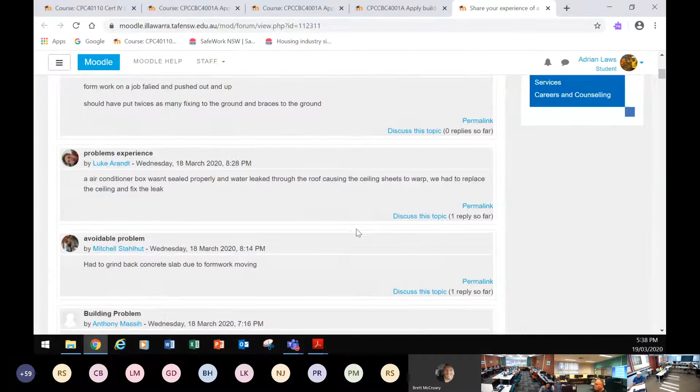That'll actually give you a green box at the top of your completions. But I'm just going to go through this, and anytime I see nothing's been discussed or solved, I'm going to go through and have a look at it. Just like tonight, we're going to have a look at different ones.

So here, for example, Jay's got one here that we're going to have a look at tonight. People are going to post different situations, and we want to be able to post where does the National Construction Code talk about that. Let's have a quick look at this one that Jason's put up. I want you to post things like, where does the National Construction Code discuss it? So in this case, the roof was not flashed properly and it caused a leak.

There's actually an amazing amount of these on all of your posts, and there's heaps of posts, maybe 50 or more posts that people are building problems.

And we want to look and see where in the National Construction Code it tells us the solution. Here, for example, if we go to 3532 for the 2019 code, that'll tell us that we need to make sure we build according to these things so we can get it all sorted.

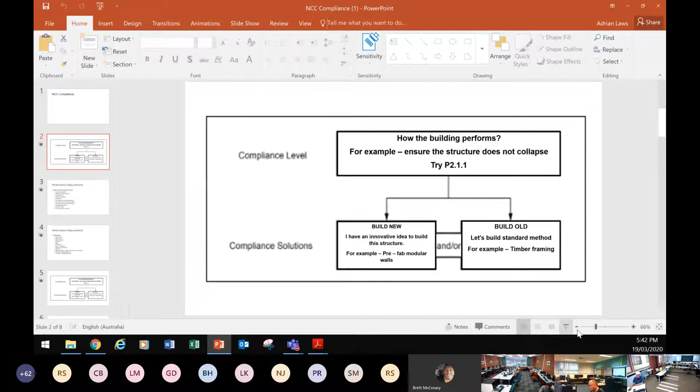Maybe I'm overloading the system here, opening up too many things. Let's just have a look. Oh, jumped onto the wrong screen. Oh, that's going to shoot me through to the other screen, sorry. Let me just escape out of that one.

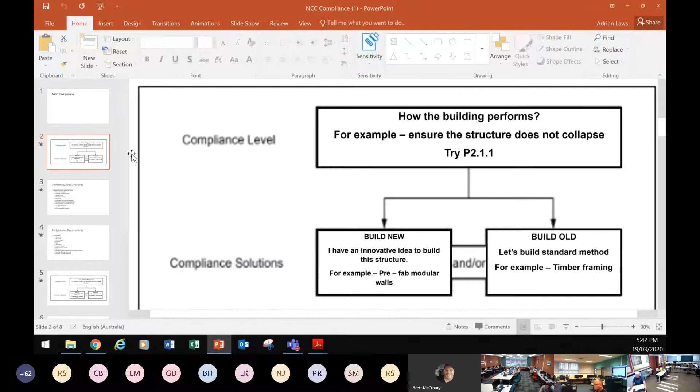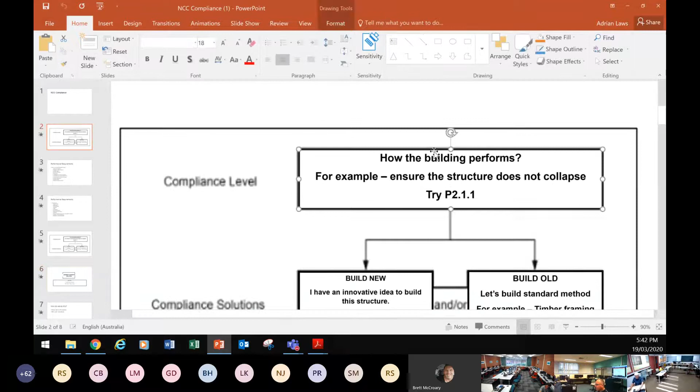So we've got the National Construction Code here, and you can see pretty much what this is going to deal with is how the code works. In the code itself, you'll see it deals with things - I'll get down here to the bottom. Oh, this one didn't have that on there, so we'll just get rid of a couple of these, get rid of a bit of this, so we've got a little bit more room. So you can see pretty much the code.

There's things listed in broad terms that tell us, for example, a building must resist water or something like that. Then we can either go down to a deemed-to-satisfy solution, which we've been doing, where it says you can use Australian Standard XYZ to resist the water, or use this method or that method. Or we can come across to a performance solution, which might be manufactured by a company who build technical documentation around their particular product. They're the main ways of how we use the code to make sure we comply. Okay, so we'll shut that down and jump back here and look at a couple of the activities related to that.

So what we're going to do now is have a look at a real practical activity.

And this is one that Brett has posted some time ago, for us to have a bit of a look at. So if you just refresh your screen, we're going to have a look at this particular activity here.

Brett says here, we've got a problem. We need help to be able to build a building correctly. And if you look at this particular activity where we can post some information, it says room heights help.

I need a certifier. During renovation to an upper floor, they discovered plumbing pipes had to be lowered, and that affected the height of the ceiling. Please confirm the height that is permitted for a kitchen.

So, for example, it's a Class 1A building. Ceiling height underside of plasterboard through most of the building is 2,400. So, are we allowed to have these plumbing pipes from an extension on the first floor? Are we allowed to have the plumbing pipes extending down below that 2,400, which is the bottom of that ceiling?

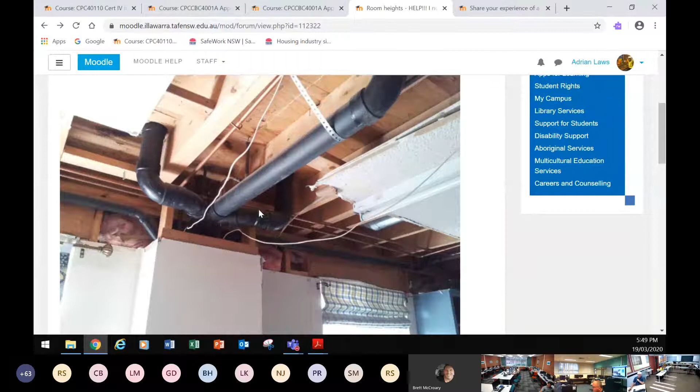But all in all, your ceiling in the kitchen is going to have parts of it which are below the 2.4, and you've all been awesome. I feel like we've really been getting this unit across to you, because you've all been able to go straight to the code and demonstrated that you can access it to find the ceiling height. So, don't need to spend any more time talking about that one - you've just done great. I'll go on.

I'll just check what I've got here for this one. Okay, so you've all done great there. I don't even need to - I will show you what the answer was in that particular one, which you've all gone to and found anyway. So that's fabulous. Now I'm real confident that you've got a real good grasp of volume 2.

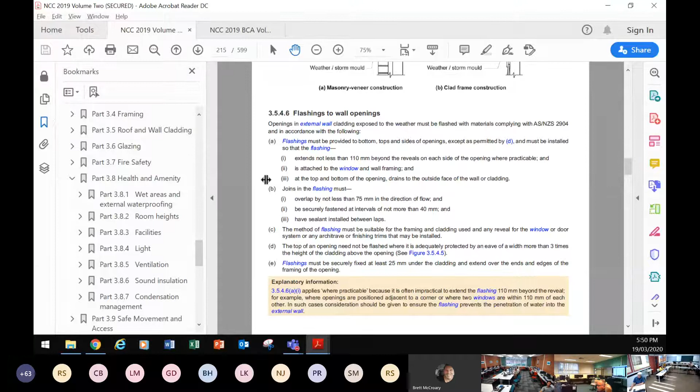Just let's refresh our memory here on volume 2 before we go on to volume 1, because volume 1 is quite confusing. For volume 2, I know you already probably know it, I'm just going to get to the point where I can make this a little bit wider. This computer's going quite slow.

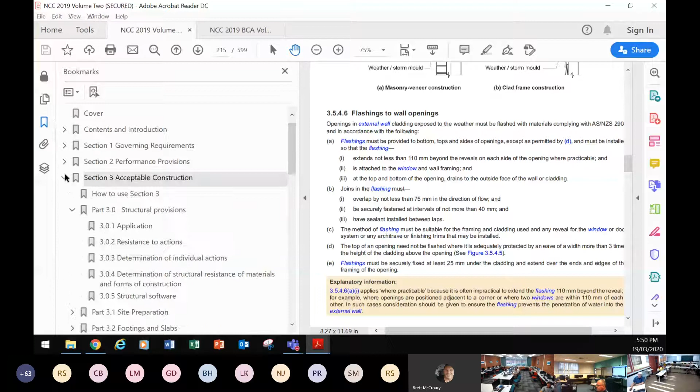I'm going to start at the top on the left-hand side here, and anything that's pointing down, I'm going to shrink it up so I can see the overall concept of what's in this document. There we go. So in fact, I can see everything that's in the document.

It's going to have the cover content, section 1 governing requirements, section 2 performance provisions, and section 3 acceptable construction. Those two parts there - section 2, I think you can see there only that information. Section 1, 2 and 3, that's where we live.

Okay, so section 1 tells us broadly a bit about the code - it's got classes of building and things like that. Section 2 tells us broadly what a building needs to do, and section 3 tells us how to do it. And then of course the last thing here, schedule 4, tells us where our Australian standards are. Definitions define things, and then state and territory, and there's other things there that are important. So that's pretty much how volume 2 works.

Now volume 1's a different beast altogether, and it'd be lovely if they used the same formatting, but they don't, and there's not much we can do about it. They're slowly changing things, and I suppose that sometime down the track they probably will make it a bit easier to navigate. But in the meantime, before I actually reveal it, let me just show you how volume 1 works.

So up here I've got volume 1. I'm going to get rid of that little bit over there and shrink this down so you can see a little bit more that it is volume 1, and this is the 2019 version. So make sure you're on the 2019 version, because the activities you do in the course that I'm doing here, they pretty much won't work for the older version.

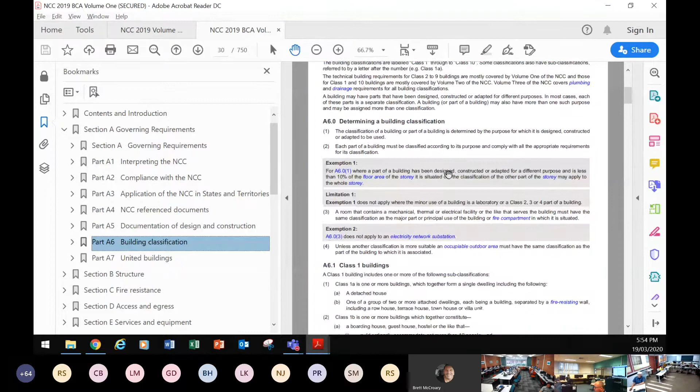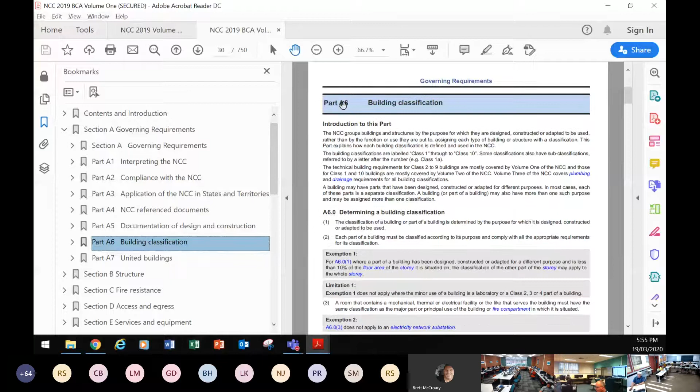Once we start working our way down there from that particular part, building classification, it's got introduction and that type of thing, and it'll go down there and start doing all of our classifications for our buildings.

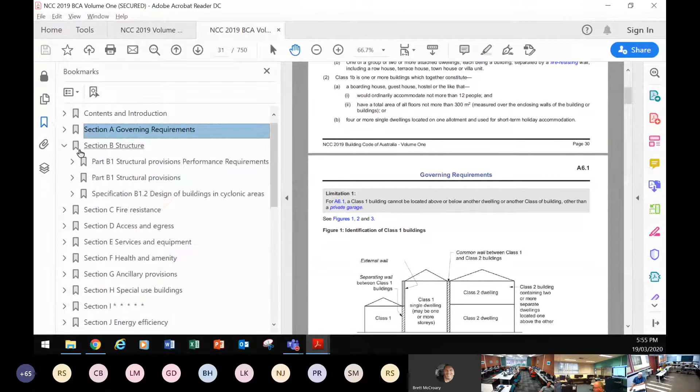So I can shrink that back up, and then I can come down here to structure. I can expand structure, click on structure here, and it tells us a little bit about structure. Come down a little bit further, and it's got a lot of the provisions and things. If I expand on that, I actually get all of the different things to do with structure there.

These ones are listed interestingly, because with these we have section B - remember, that's a letter, not a number. And then once we start jumping down below section B, we start going B1, and then B1.1, B1.2, 0.3, 0.4. So that's B1 in there. And in this particular case, they're all listed as B.

Some of them might go to C2 or something like that. I'm not quite sure how each individual one works, but as we expand them out, we can see there's information there. Most of them are pretty much the same, where we have structural provisions, performance requirements, and some information like that. You can see with this one here, we've got C is fire resistance. If I expand that one out, we've got structural ability, spread of fire - they extend down, and each of those just gives us more information.

So without jumping in too quick and getting too confused, you'll see that most of these will have an ability to be able to quickly jump to these things. In this particular one here, we've got structure at the top.

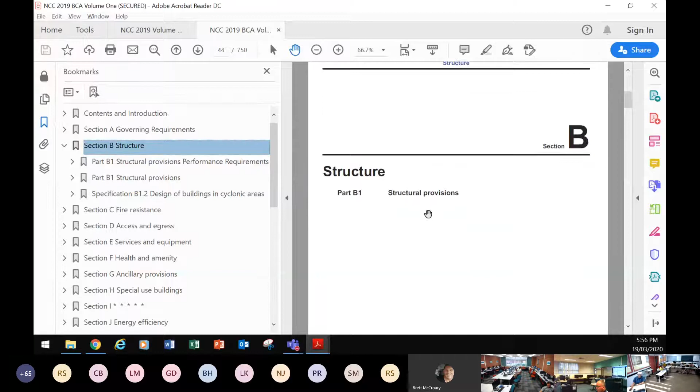We go down a little bit and come to structural provisions. Before we go that far, underneath structure we've got some headings, and each of those allows us to click on it. First of all, we've got our performance requirements.

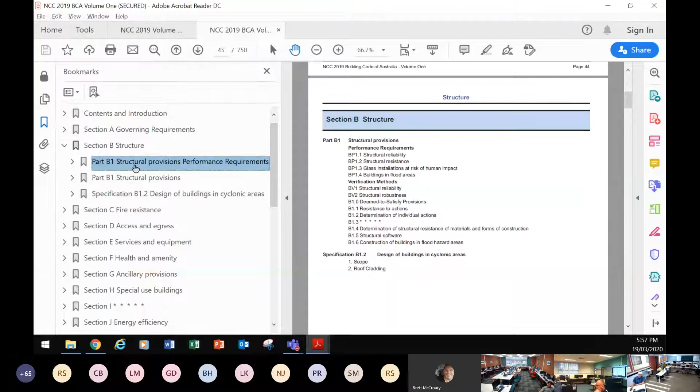In volume 2, our performance requirements are here under section 2, and then we have our acceptable construction. With volume 1, we have our performance requirements, and then our verification methods and more information. So we kind of have performance requirements for each different item, not just one whole section on performance requirements.

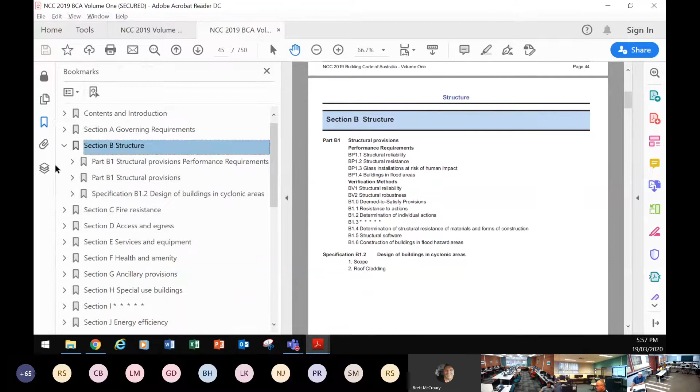So that gives us performance requirements for structure, and then we go into the structural performance requirements. It lists all the things to do with that. We can even expand that a bit further if we want to.

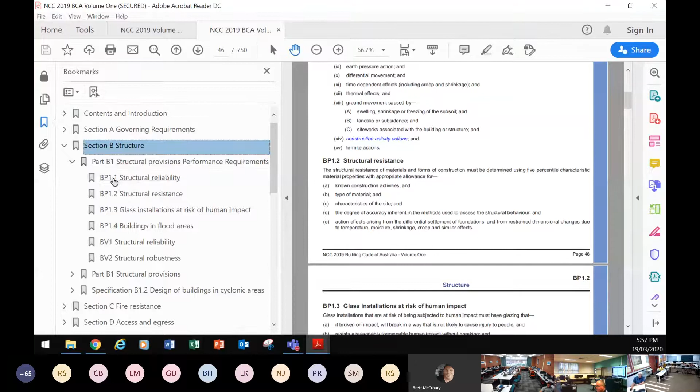Then when we come down here to fire resistance, we're going to have our different parts where we'll go into some of the different performance requirements for things as we go through. So we start to get this structure where we've got, for example, section B, then part B1, and then BP1.1. And under that we might even have more things.

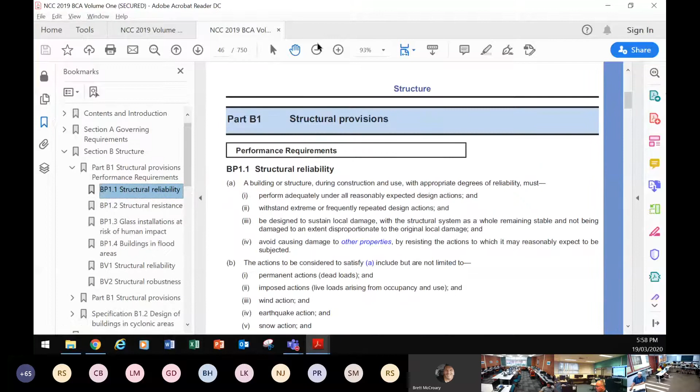If I expand that out a little bit, you can probably see on the side there. If I bring this across, you can see for this one we've got a BP1. So B1 is the structural provisions, BP means performance requirement, and that's 1.1. And that'll go through for some more, 0.2, 0.3, 0.4.

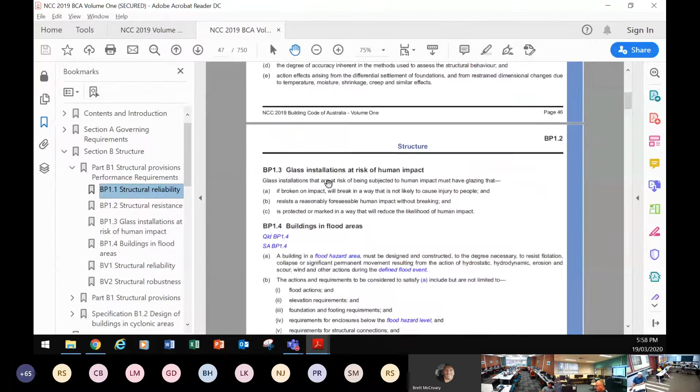And then we come to a thing called verification methods, and this will be a BV. So B is the section, and V is the verification. And we can keep on working down there as we go looking for things.

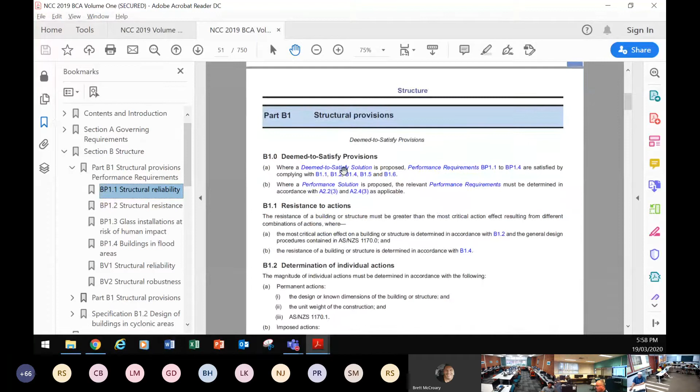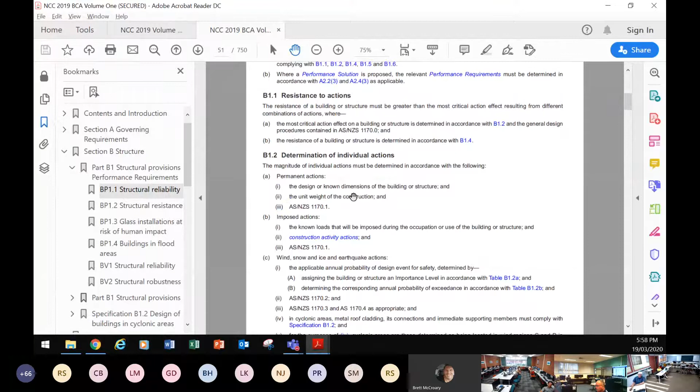And eventually that's number 2, and eventually we come down to our structural provisions. This is where it starts to feed us into some more specific information. Look at that there - this particular one refers us to Australian Standard 1170, which is the Australian standard for loads on buildings. So this has gone down real specific into how our building is built.

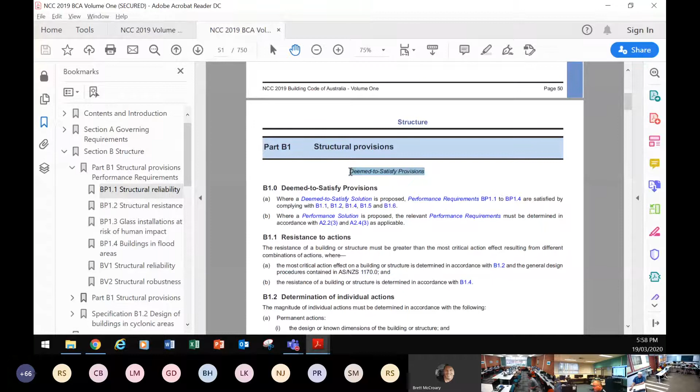And then we keep on coming down there. Remember, this is under the part here for structural provisions, and this is under deemed-to-satisfy provisions. I personally think that heading probably needs to be much bigger, because on volume 2 it's basically deemed-to-satisfy as a really big heading for things, but this is pretty much what tells us.

So for volume 1, we see deemed-to-satisfy, and it's going to refer back to these performance requirements. That's pretty much how this code is quite different - volume 1 is quite different in its labelling to volume 2 and how it works.

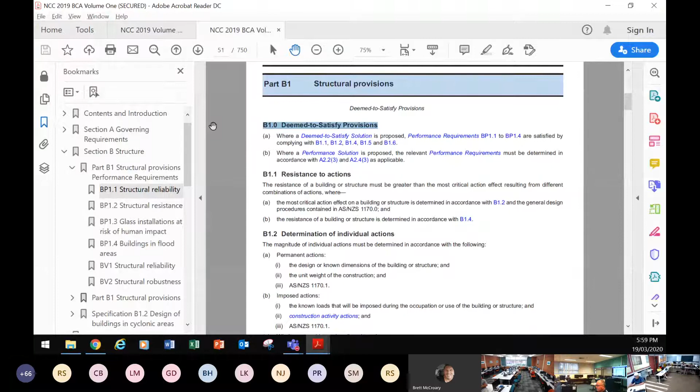Now let's jump back to, just refresh this, and let's jump to our PowerPoint here on energy efficiency and have a quick look at how this actually works for energy efficiency.

In this particular example, let's think for residential - we need to meet the performance requirement for energy efficiency. Under volume 2, if it's residential, it's going to be P2.6.1 for building, and that's the type of thing it might say. You have access to this PowerPoint yourselves.

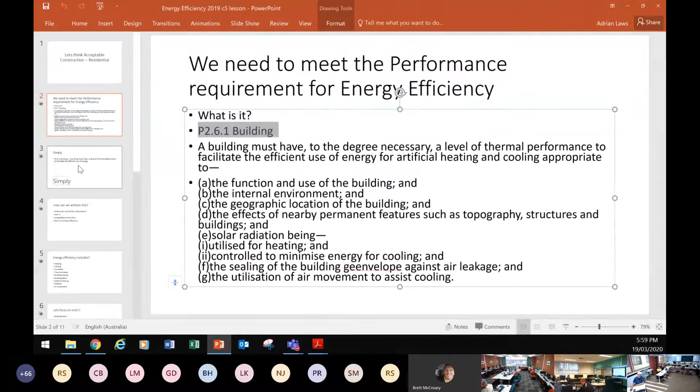So basically it says a building must have a level of thermal performance to facilitate the efficient use of energy. I'm pretty sure that's the wording from volume 2019, but if that's a little different, forgive me for not getting everything up to 2019. I think I've got most things.

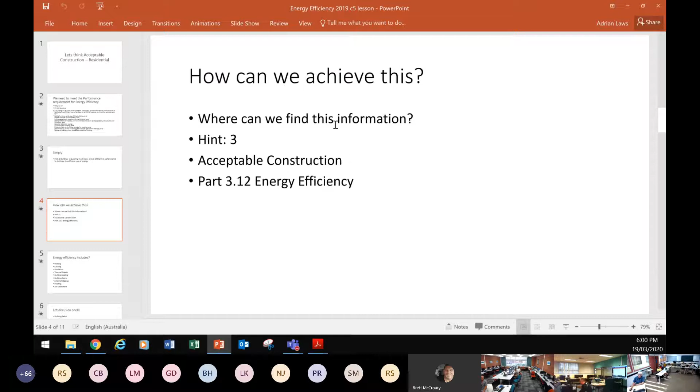And so it says, how can we achieve this? And we go to part 3. So that's a key right there - if you see part 3 point something, that's going to mean volume 2. If it's not a number but a letter, that would be volume 1 generally.

So these are some of the things that it talks about in volume 2, and then we look here focusing on one of them - in this particular case, 3.12.1, the building fabric.

And if I go now back to volume 2, and if we look at section 3, which is here, I'm on volume 2. So on volume 2, if we go to 3.12.1.4, so I'm on 3 here. Where are we? Section 3. So we're on section 3.

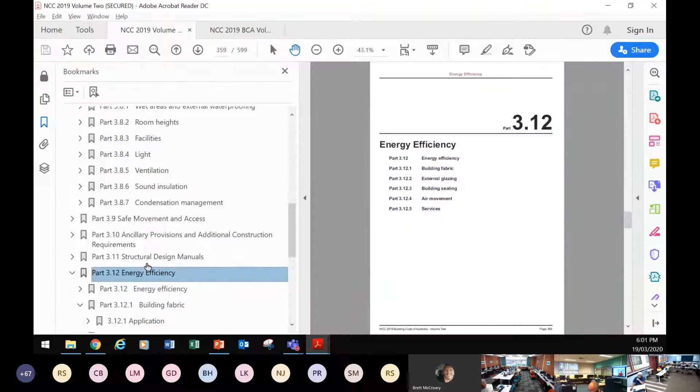And if I go down here till 12, I'll pump that up onto the side so you can see it with a bit more magnification. So back here on our PowerPoint that's available to you, we're looking for 3.12.1.4, so we can see exactly what's required for external walls. So 3.12.1.4 A and B.

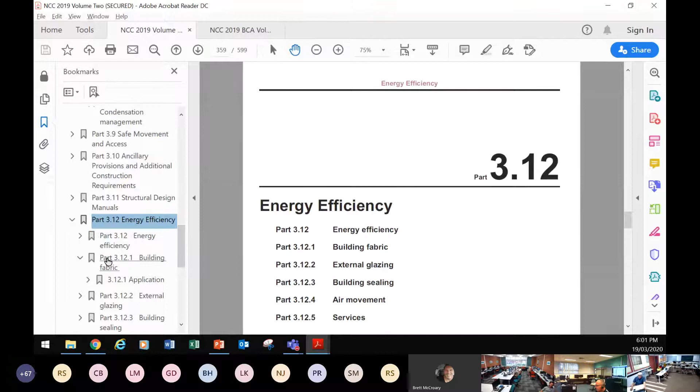If we go to 3.12, I don't know whether these are linkable, so we've got to use the side here. We're looking at 3.12.1.4. There's 3.12.1, and we're looking for 3.12.1.4. So I'm just going to go to, I think it was 3.12.1.4.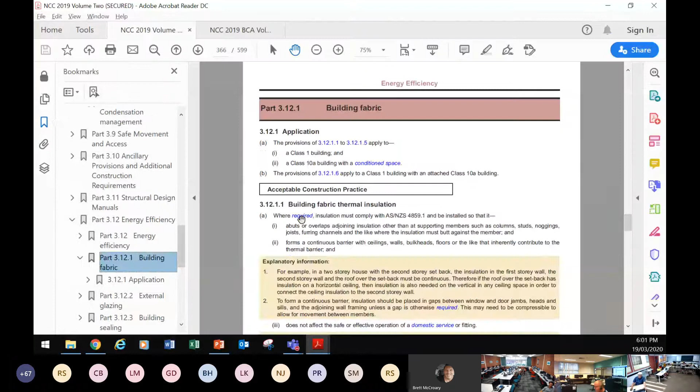So that's back up here. 3.12.1, the building fabric. This talks about the building fabric, and the one I've highlighted for you for external walls is point 4. So we'll go down till we get to point 4. That's point 2, roofs, keep going down. If you want to find that quickly, bring up the search, I think it was external walls, not floors. So I'm going to bring up 'wall', and that should take us quickly through.

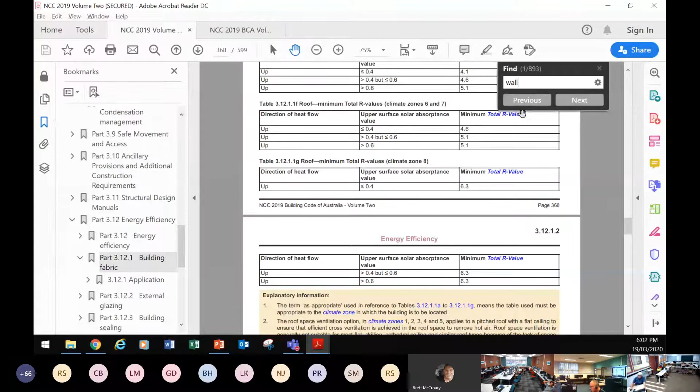There you go. It's taken us straight through to the next instance, from the page where I was to 3.12.1.4. This is going to tell us about external walls. So I'm going back here to look at what it's asking, what I've directed you to. In this particular case, we're looking at what the details are for the building fabric for external walls.

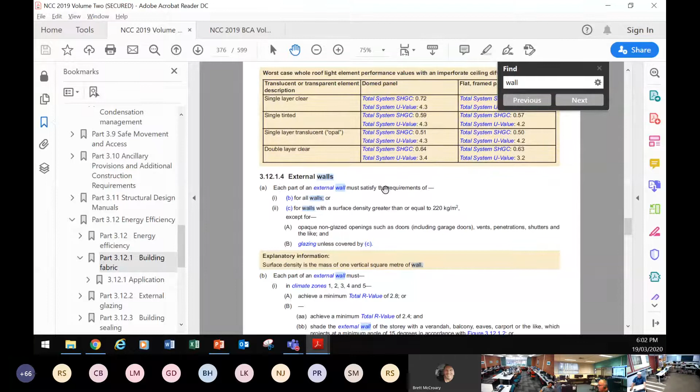And it says there we must achieve a total R value of 2.8. So here we go, we can read through here. It says each part of an external wall must satisfy the requirements of B for all walls, which is here. And if we keep going down, you'll see there's a little bit of information for certain types of walls. And we come down here and see each part of an external wall must, in climate zones 1, 2, 3, 4, and 5, achieve a minimal total R value of 2.8.

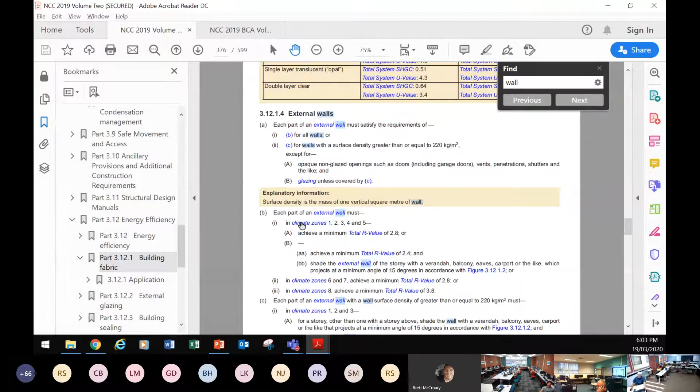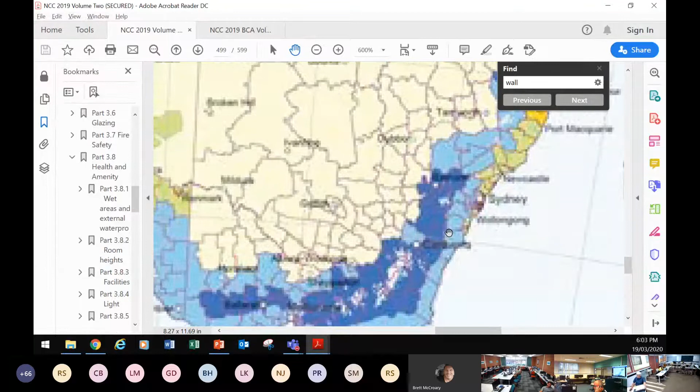Okay, so anybody guess what type of climate zone we are in here in the Wagga area, for example? We can look at it. The Illawarra area would be a bit different, so we're going to have to zoom that up, obviously. But this particular map specifies the different climate zones in Australia, and you can all access it yourself, and it should come out a lot clearer if you allow it to load fully.

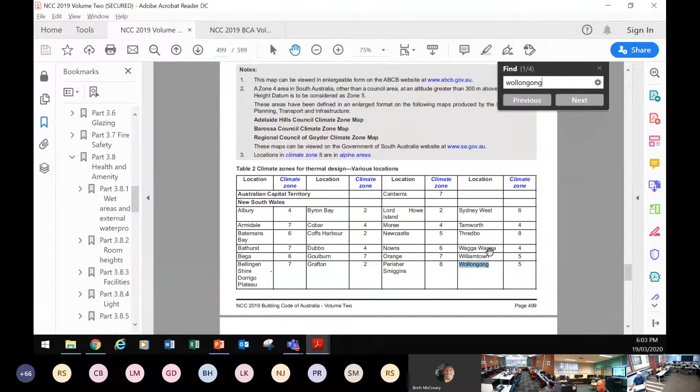And if you're not quite sure, hey, it's quite easy because you can just jump down here and search for your town. So what have we got here? Climate zones, various locations. The easiest way to search for that for Wollongong is to just bring it up here as Wollongong. There's Wollongong, mentioned 4 times. Let's go to the first one. There it is there, and you're in climate zone 5. Wagga's in a 4, it's pretty hard to see on the map there.

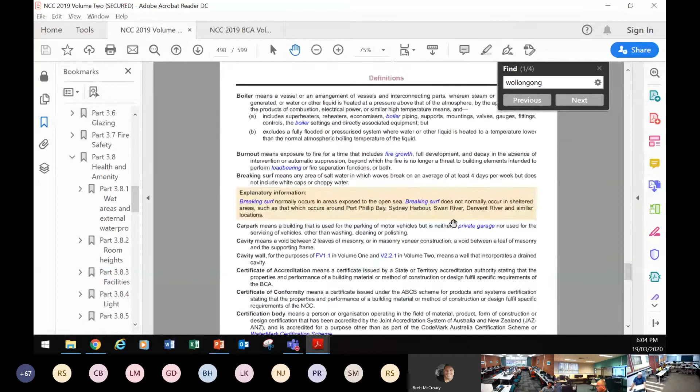It's a bit small. So that tells us pretty much that if we're in a 1 or back where we were on 3.12.1.4, I'm just going to go quickly to that so we can jump straight to it. Oh, there's 26 matches to that, so let's just jump to that one. Here we go. So if we're in a 1, 2, 3, 4, and 5, that's pretty much probably going to be most of us. I suspect Cooma might be a bit different, or if we've got anybody up in the highlands, maybe Goulburn, or I know there's a student up in Moss Vale, that might be a little bit different. I'm not quite sure, but mostly that's going to be the requirement for the outside of the building.

Now, when we talk about a requirement of achieving an R value of 2.8, that's pretty straightforward. That tells us a little about what R value means here. That's meters squared kelvins per watt, and it's got definitions of that in the code. But we have to basically choose a type of material.

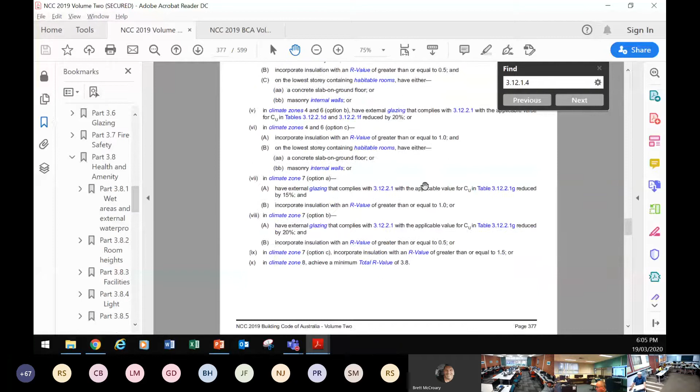And if you look in your code to figure, I think it's figure 3.12.1.3, you'll see that diagram which lists the external wall construction, and that shows you a 0.48 value of the construction. So I'm just going to go through and show you what that looks like. I think that figure's just down the bottom here a little bit, just scroll down and find that one. That might be it there. So this particular one says that a weatherboard external wall construction gives us a total R value of 0.48.

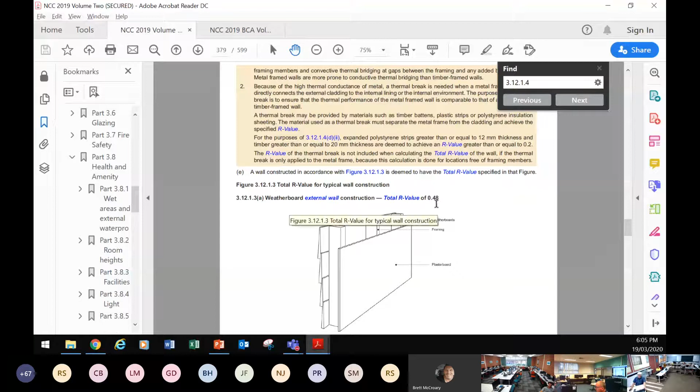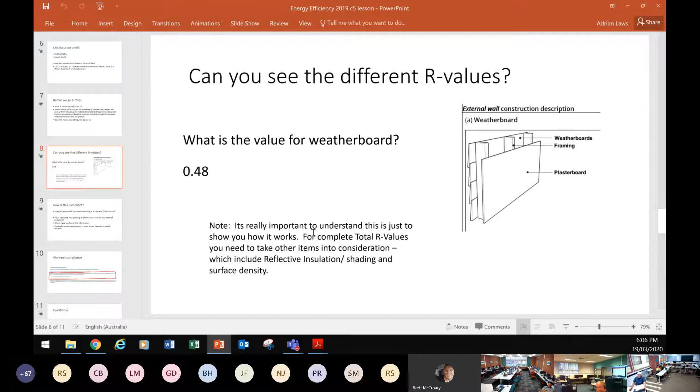Now, of course, the question is that 0.48 per metre, or per square metre, or per what? If you go and look at the word total R value, it's based on per metre squared, metre squared kelvin per watt. So that'll give you 0.48 per metre squared, and we need 2.8. So in those areas, we would probably have to put some insulation in there to be able to increase it.

So that hopefully helps you with how to satisfy that. I think that covers some of the points there, and that's pretty straightforward for that particular one. Hopefully you're feeling a bit more confident in that.

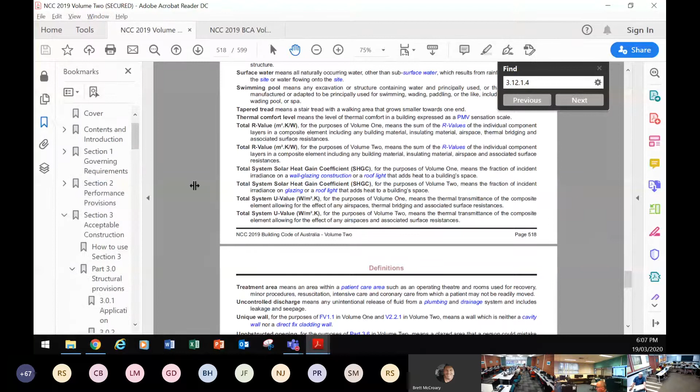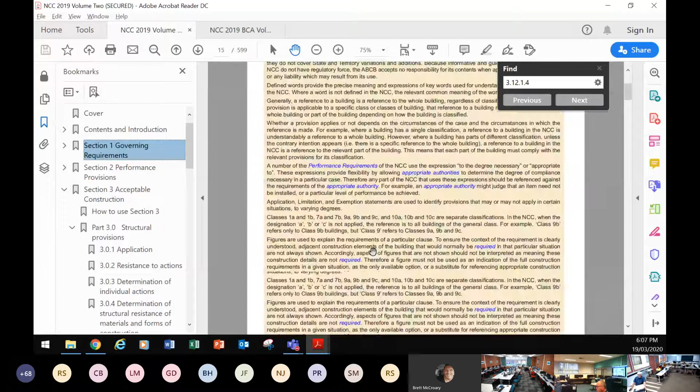If you forgot what the methods were, let me go to the code and show you the different methods for compliance. I'll put that up on the screen while you're thinking about posting your comment there. You'll be so sick of seeing this picture that as soon as I put it up, you'll recognise it. Your job is to note in your comment which particular method we're using out of the two options for being compliant.

So it says we need a minimum of 2.8. We have a wall where we've chosen enough materials to get 3. Are we compliant? Obviously the answer there is yes, just in case you weren't quite sure. Then what you need to do is think: are we using a deemed-to-satisfy solution, or have we used a performance solution to be compliant? Let's go and see what you all say.

I think this is a pretty easy question, this one, so let's see how you go. Has anybody posted anything and got the little green box yet? No posts yet. Josh is first — good job, Josh.

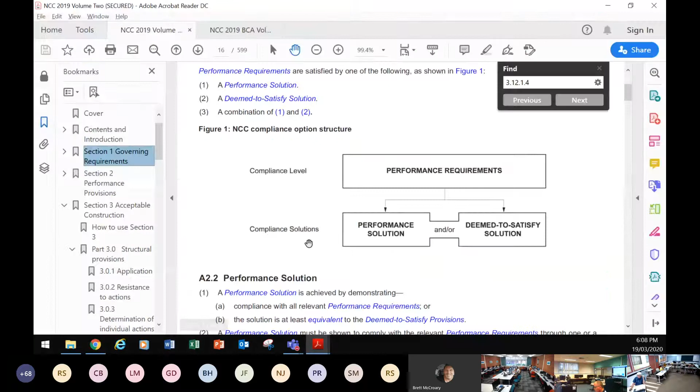Yes, we would be compliant, and we're using the deemed-to-satisfy solution. If we were using a standard system that somebody had developed and produced, there's probably not enough information in your answer — if you told us what type of system, that's probably okay.

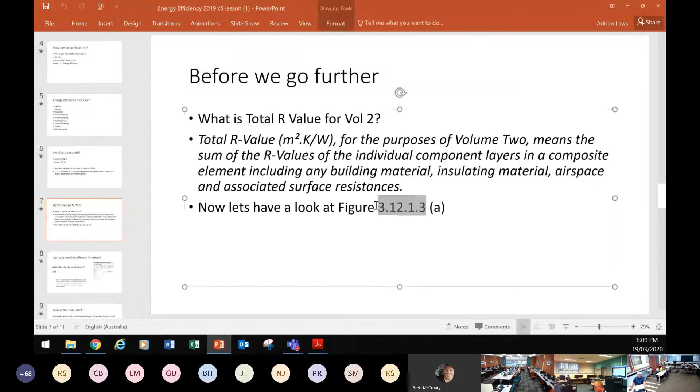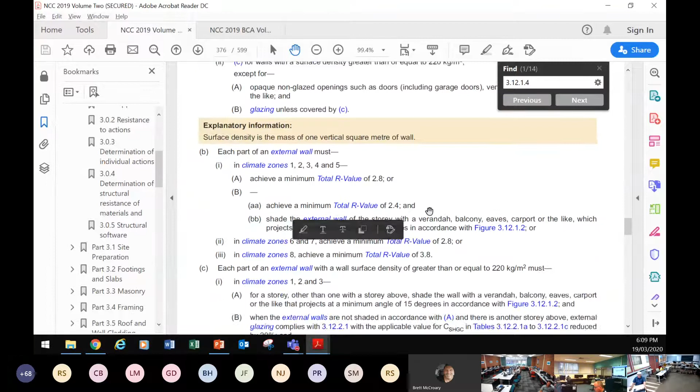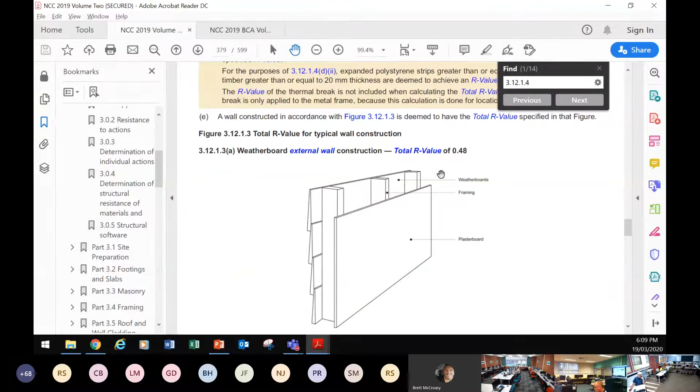But in this particular case, let me jump back to this PowerPoint and have a look, this one on energy efficiency. If we're using the method shown here, 3.12.1.3 in the code, under external walls — if we're using a method shown in the code that gives us a reading for a specific type of construction, in this case weatherboard, with a 0.48 rating, then we're using a deemed-to-satisfy method.

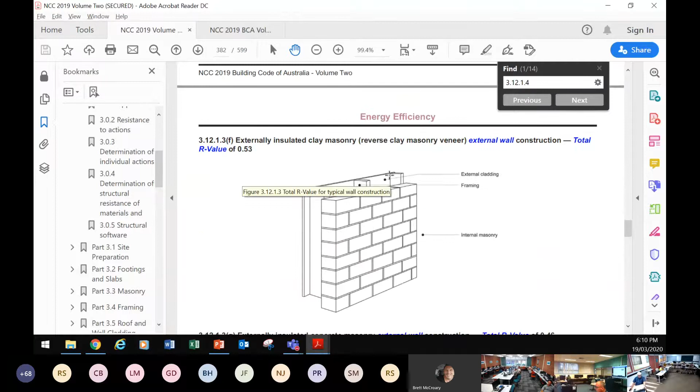If we're using this one here, fibre cement sheet external wall built like that, and it gives us 0.42, we're using a deemed-to-satisfy method. If we're using a clay masonry veneer external wall and it gives us 0.53 square metre kelvin per watt, then we're using a deemed-to-satisfy method. If we're using any of these listed in the codes, we're using a deemed-to-satisfy method. Okay, so let's just refresh this here.

Let's go and have a look and see what you've got in your chats there.

We are going to come to the other one, the performance solution method. He's using a DTS - deemed to satisfy. DTS is very specific, using a system specified and tested by Australian standards or some organisation that's tested things and written down all the details. If we build according to the details, it'll all be fine.

I think it was Josh who brought up the point about performance solutions, because I want to highlight to you, I'll show you where you can find this so you can look for yourselves - this is pretty useful for you. You've all posted probably 50 or 80 or more building problems based on last Tuesday night's exercise I set for you. I think that'll be so useful for you to solve your problems, I've put it here at the bottom of the headers for every night. So if you click on the headers, you'll get to this one where you can share your building experience.

We had one here that was a performance solution, and it used something I'm pretty sure you'll all cotton onto. I thank Jay for posting this one - Jay's posted a problem where somebody used Scyon sheeting, which I reckon a lot of you are using these days. The problem had something to do with construction details - they're not installed according to the required angle at the junction of the external Scyon sheeting flooring, and it had leaked and caused dramas.

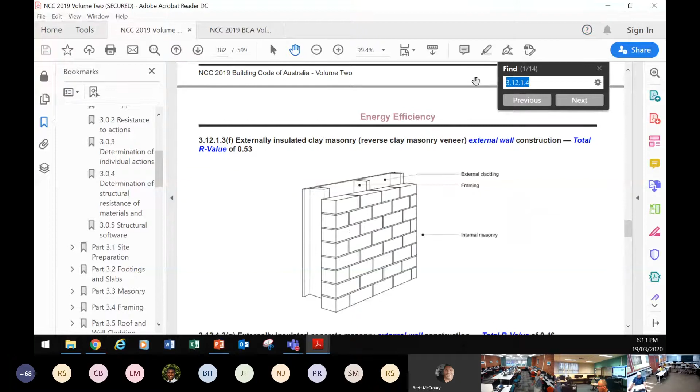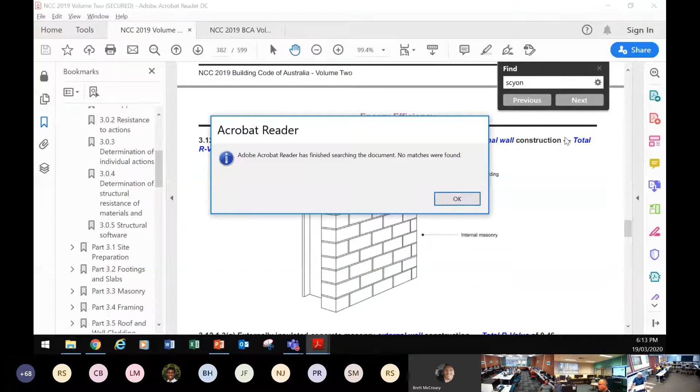So we're talking about Scyon, and we want to know whether it's deemed to satisfy or a performance solution. I can tell you now it's a performance solution - I think I might have spelt that wrong. What did you call it? SCYON, yep. When I type in a search here for that product, it's not going to come up with anything. Let me make sure I've spelled it correctly. I'll go to the James Hardie website and grab the word Scyon from somewhere up there. There we go, SCYON. I'll go back to the code - SCYON - and it's not mentioned in there.

But that product is actually wall cladding - that's mostly how they do it. So let's have a look and see from our point of view where they tell us to use it. Let's look at Scyon walls and get to the home page. In this particular case they've said: featured homes, how-to articles, discover how cladding and weatherboards create beautiful individual looks. So this comes under the cladding and weatherboards part of the National Construction Code, and these guys who have produced this have to meet the requirements of the National Construction Code. Their requirements are no different to anybody else's - they have to meet the performance requirement, which is up the top here.

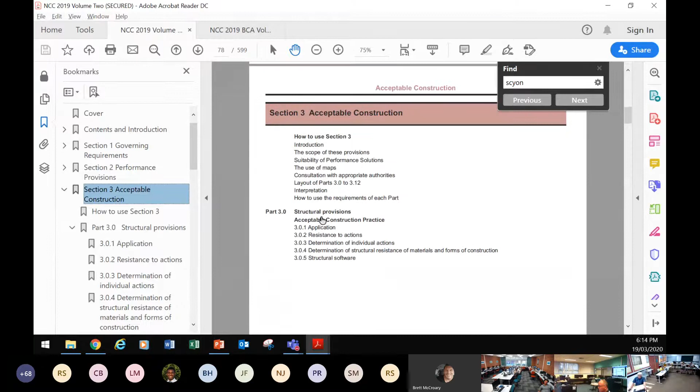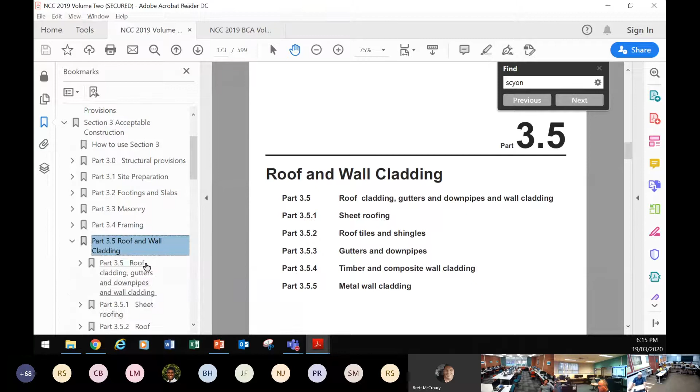I'll come back here to number 3, acceptable construction, and in their particular case it's dealing with cladding. So we come down here and shrink a few of these so we can see where we're at - we're looking at roof and wall cladding. They have to meet this particular one, which is 3.5. That one may be better for them, 3.5.4, but definitely they're dealing with 3.5. Let's have a look at 0.4 because this is probably more of a composite type one, and if it's a composite, which I think it probably is, you'd have to look in the material safety data sheet for it.

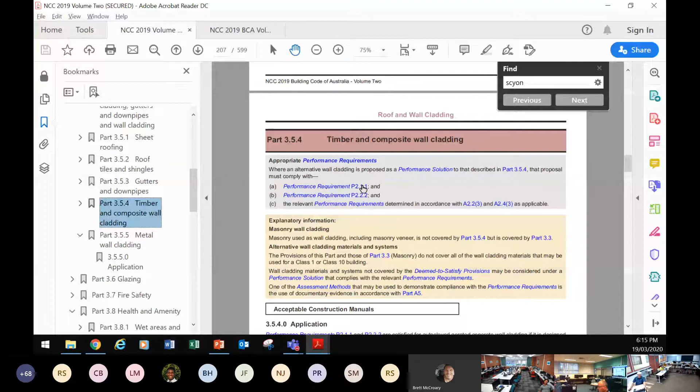It doesn't mention Scyon here, but they would have to have their own technical documentation. So the performance requirement they've got to meet is 2.1 and 2.2. The performance requirement for 2.1 says... oh, I clicked on the wrong thing there. Let's jump back up to the performance requirement.

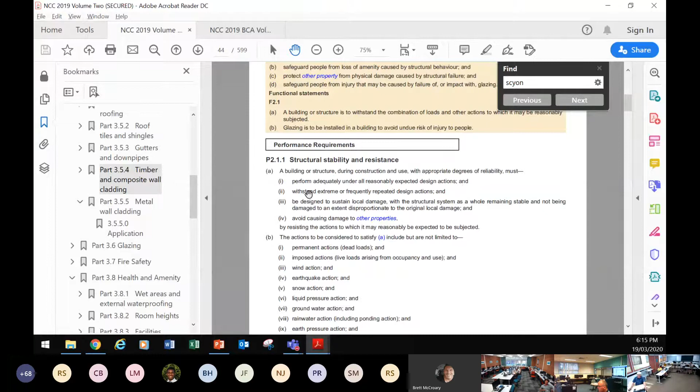In this particular case, performance requirement 2.1 takes me here, and it says a building or structure during construction and use, with appropriate degrees of reliability, must perform adequately under all reasonably expected actions, withstand extreme or frequently repeated design actions, etc. I think it says here a little bit we could pick up about weather - that's dead loads, live loads, wind action.

That's what the cladding has to help with. Liquid pressure action - definitely it's got to perform well against liquid pressure action. Rainwater action, there you go - it's not allowed to be harmed in any way by rainwater action. So it's got all the details there about what it has to resist.

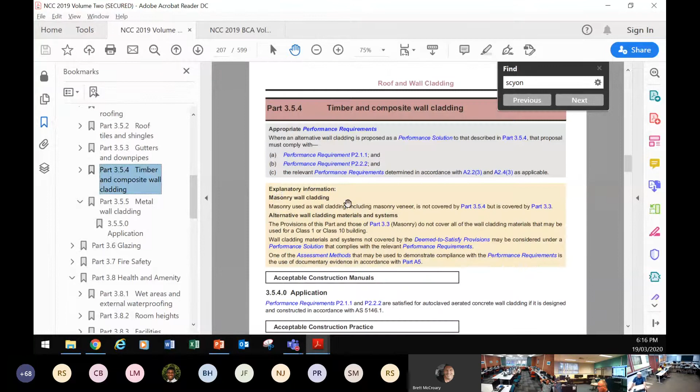Now it comes down here to more construction practice, and eventually it'll come down to things like composite type cladding, and they will have to meet the requirements for that. Pretty much for products it won't actually mention the Scyon product, but when you come to the different product, the manufacturer is the one who's going to produce the documentation that we use, that would look like the deemed-to-satisfy solutions. So in here you have to pick one.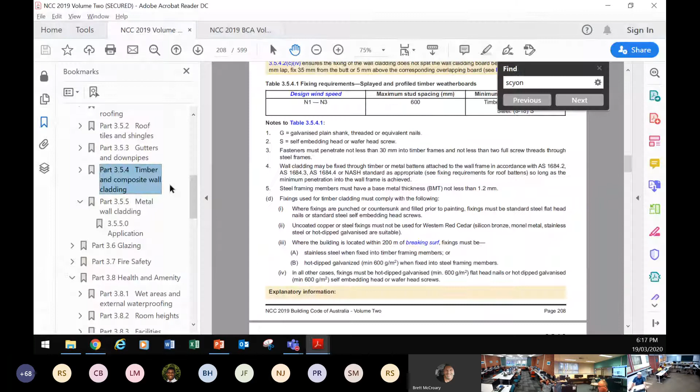I don't know whether Josh is online there. Oh, Jay, I don't know whether you're online or not, Jay, but if you're online, or if somebody can just type into the chat box, tell us what you're using mostly these days as a product - are we looking at 150 Linea, 180 Linea, or the 255 splayed? What's somebody used recently who might have experience about this? If you don't answer soon, I'll probably just pick one.

I'm not actually sure which one Jay was referring to. It's not coming up on the chat there, so I'll just pick this one. I'm going to pick one of these because they have lots of different products. This is your 180 Linea weatherboard - there we go, this is your Linea weatherboard.

There'll be documentation in here somewhere. I haven't pre-prepared this, so there'll be information and documentation in here somewhere for builders and people who use it, to tell them about all the details about this. Because remember I said earlier, in the work health safety unit, that a manufacturer legally is not allowed to produce a product without telling us how it's worked, what the dangers of the product are, or potential dangers.

There we go, technical installation information. It's usually hidden in the website because most people don't want to know about that - they just want to see the pretty pictures. And here we come to product details, and eventually we'll come to some information about the material safety data sheet, which I'm interested in, and also the installation information.

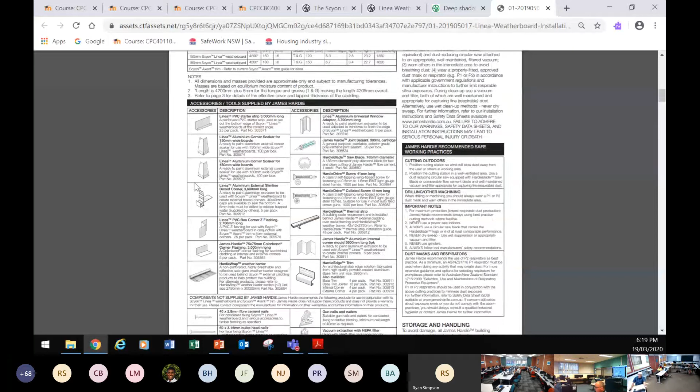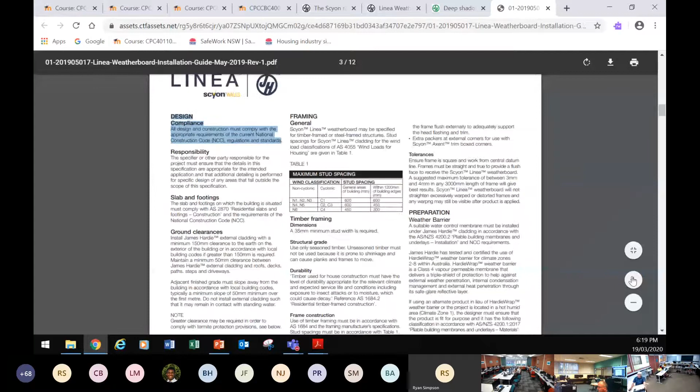This will tell us things like what you would get if you went and bought a toaster tomorrow - it'll tell you a little bit about it, show you some pictures of all the buttons on your toaster, in this case some of the accessories that you might need to be able to make it. It tells you a bit about designs and compliance - you can see quite clearly there that it says all design and construction must comply with the National Construction Code.

So they're going to give us information there of how we can still meet the code, which is all good. They refer to Australian Standard 4055, which we're going to look at in depth when we do structures later this year. This particular one is going to say that all their cladding must meet that.

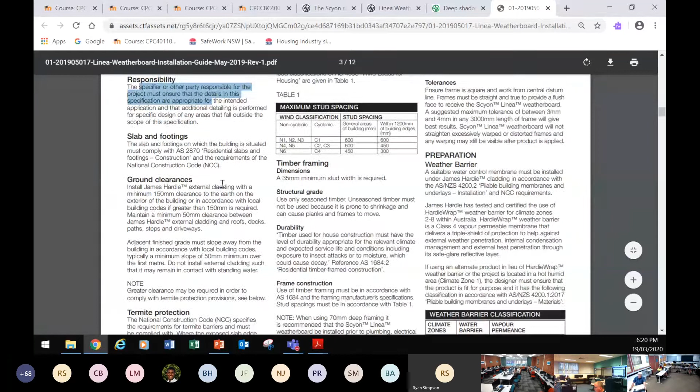They talk there about the importance for the specifier and probably the installer to make sure they know how it works, so you don't have the problem that Jay had. It talks a bit about information there, just referring you straight through to Australian standards.

Okay, it does have some information here that Australian standards don't have for this particular product, because this particular product is so new that it hasn't made it into the Australian standards. And that's good, because these guys can manufacture these products quite quickly.

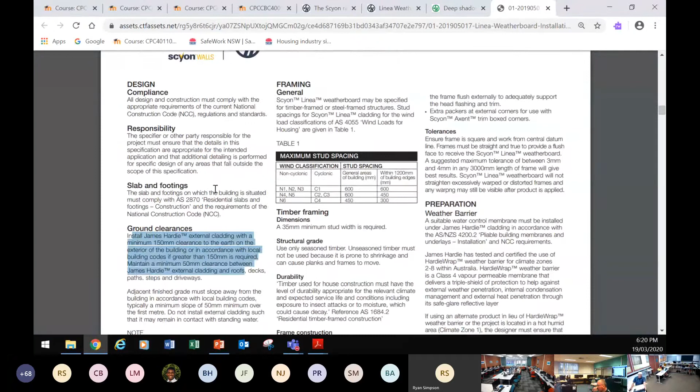I think we saw there somewhere, May 2019, had a date there when some information on this product was put out. So it's fairly recent, and it takes quite a while for information to get into the National Construction Code, because it's got to go through a lot more responsibility.

So this will talk about information there with termites, fire rating, structural bracing, all those sorts of things. It'll tell you actually what to use for. In this particular example, it tells you your fire rating.

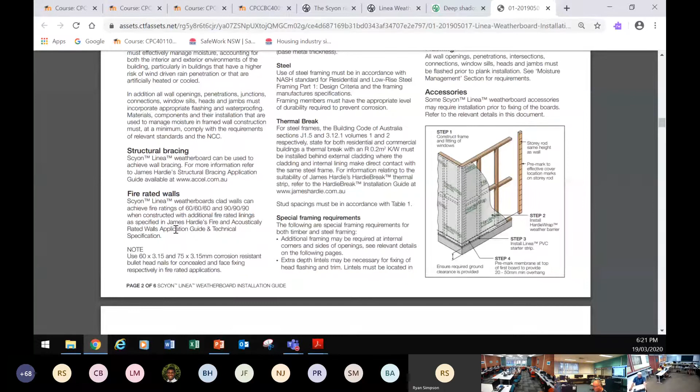They actually have more information there on their application guide and technical specifications. So there's more you might have to contact them for.

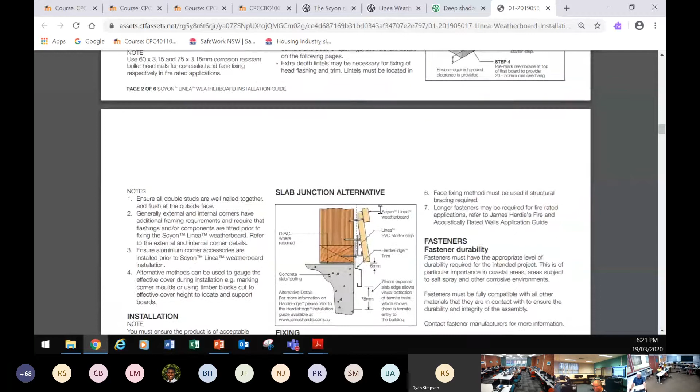And then they tell you, just looking for specifically something there about the size nails or fasteners that you might have to use. So these guys are going to actually tell you the exact type of nail that you should get when you go to buy them.

Here we go, this is an example of what you get from this. These guys have done the testing, and they said you need to use 60mm by 3.15mm diameter bullet head nails for that particular example. In this case here, you've got to use Linea PVC starter strip and those things.

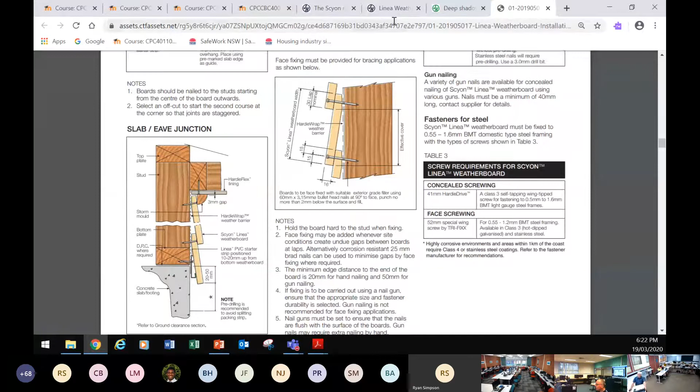If you don't build things exactly according to that, you'll have Jay's problem potentially, where Jay said that he's got that issue. So I'm just going to copy that there, copy that document.

I'm going to reply to Jay here, and for Jay, I'm going to put in there: this product is not in the NCC volume 2, probably because it is too new.

Refer to here, refer to manufacturer's details, as this is a performance solution tested by the manufacturer.

And there you go, so there's your details for that one. I've posted up there, so now Jay can run around and say, grab that document, talk to the people wherever it came from, and check, and you'll find that gives you your solution to your thing there.

So hopefully that works pretty good for you all. Now, that's pretty much almost all I'm going to go through with you tonight. I'll just check my list of things here and make sure that we're all good.

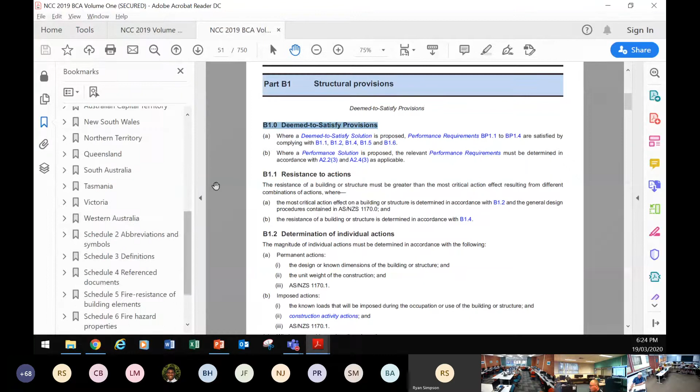That's pretty... I'm going to put a little post in there to help you all with that. So to find the best way to get the different sections from volume 1 is to grab your bookmarks on the left hand side, and you can see I've got all the sections listed there, and then I'm going to just copy that part of the page.

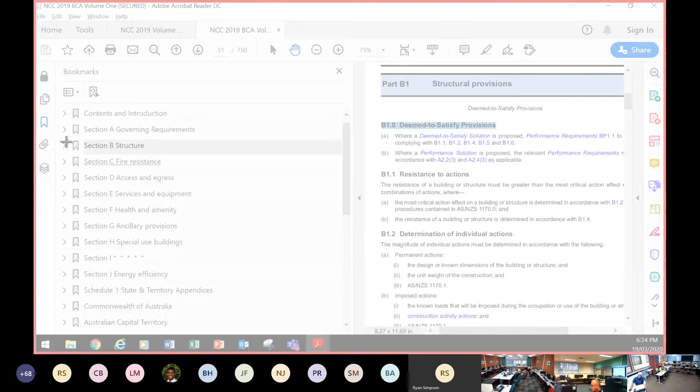So most people with a Windows document, if you push Shift and the Windows key and S together, it'll dull everything, and then it'll give you the option to click and drag all around the different sections. I'm just going to grab all the sections there, and that's basically taken a photo of that page.

And then when I add a new discussion topic here, that's going to allow me to put that in there, I hope.

Maybe it's not. No, it's not. I'd have to turn it into a photo first.

That's probably a little bit more complicated than what you need right now. You can actually jump in and grab this information if you want to. I'm just going to save this, put this in here for now, and then post that up into there. So I've got to just grab that photo and put it in there.

It's not always that easy to find, and that will get us our posting there. Just grab that. You just have to watch where you put things. In this particular case, I'm just going to pop it on the desktop as untitled for a second till I go and grab it here, then I can jump back to my desktop and grab that one, and I'll be able to upload it into here. You're welcome to use that too if you want to.

Sections. That will put it into my post. I'll do my little post, so I'll put a little post in there for you. Someone else has done one. Josh has done one. Fantastic.

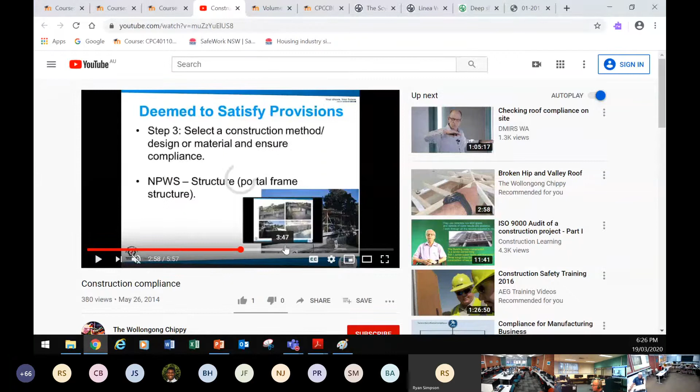Brett's put up from a job that he did one time. I'm not going to actually play that now because we're going to be here too long otherwise. But I do want to just show you quickly, if I pause that one, that Brett built a building years ago, which he's put pictures on there about, and he's discussing how that relates to the deemed to satisfy provisions from volume 1, because it's a commercial building down at Narooma. There's some real good information there for you to understand how deemed to satisfy works for volume 1.

So I want to just open up for a second and ask, are there any questions about the content we've been going through tonight for volume 1? Are there any questions by people at this stage, or is there anything any of the teachers would like to add? I think we've got Stuart there.

We've got, I'm not sure if Nowra's there. Have we got anybody in Nowra? Could you just check if you've got any questions? Is there any questions about... Stuart, did you have anything you wanted to add regarding volume 1 and being able to easily navigate and find your way around volume 1? Do you have any tips to add there?

All I would add is that you need to, first of all, find out what year the construction certificate was approved for the construction you're working on. Because even though you're working on a house in 2020, if the construction certificate was prior to NCC 2019, for example, it may be that the applicable construction NCC code is 2016. So we all need to reference back to when we're doing a new project or doing additions and alterations - if there has been a PCA certification giving a construction certificate, we need to see what volume of the NCC has been referenced.

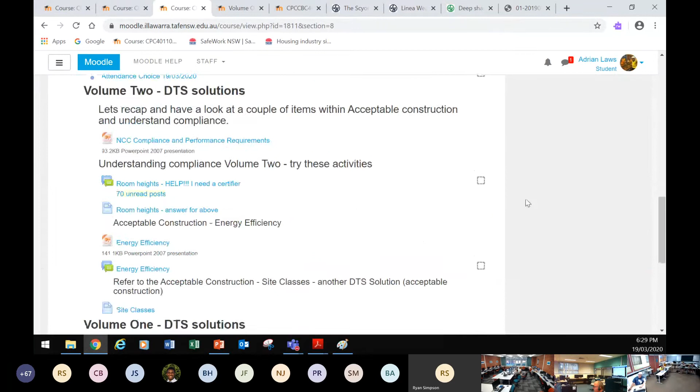Let's say, for example, in this bushfire case where people might have parts of their damage that wasn't structural, damaged by the bushfire, and it might be a 3 or 4 year old building built according to the 2016 code. The way they'd have to rebuild it, would it be according to the 2016 code where the building was approved, or would they need to redo that according to the 2019 code?

It would need to be to the 2019 code, for any new work that's being done on a building. For example, if they're doing work on a building that's already been approved and hasn't been affected by fire, they can stick with that - the applicable NCC is what was referenced in the construction certificate, so it'll be 2016. But if they're now going onto a site because Mrs. Smith's lost her shed, or had significant fire damage, the new construction would be approved under 2019.

Okay, thank you very much for that. So potentially people could be even going back to earlier construction codes to be able to reference, possibly. Yes, that's correct. Okay, so I'm going to open it up now to pretty much anybody to put a chat in, or also to be able to go and do the activities.

While those activities are running, I'm just going to go back and share with you the National Construction Code. If you go to the Australian Building Codes Board, you can actually find the old codes there - they're referenced, though sometimes you've got to search back a little bit to find them. There, for example, is the 2016 code - it says right across the front of it, it's archived. And you can keep on going back. I'm not sure how far back it goes, but we can go back and have a look. There's the 2016 series - you might already know, Stuart.